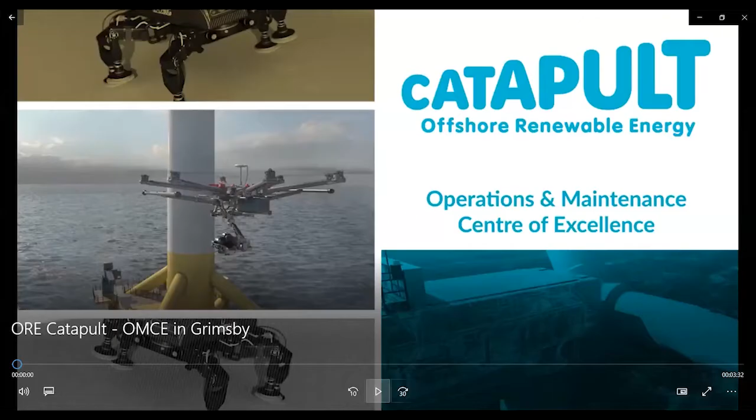Delighted to announce the opening of our new facility for the Operations and Maintenance Centre of Excellence. Situated within the port of Grimsby, we have located ourselves at the heart of UK operations and maintenance for offshore wind. With planned investment of over £35 million in the next 5 years, we are committed to aligning our services to the needs of this growing sector.

I'm very pleased to personally welcome the Operations and Maintenance Centre of Excellence to its new facility within the Port of Grimsby. Offshore Renewable Energy Catapult's move is a reflection of Grimsby's leading role in offshore wind, one of the UK's fastest growing energy sectors. We have a long and proud maritime heritage, so it is testament to our town's ambition that we have transferred our skills and expertise to a major and long-term industry in offshore wind.

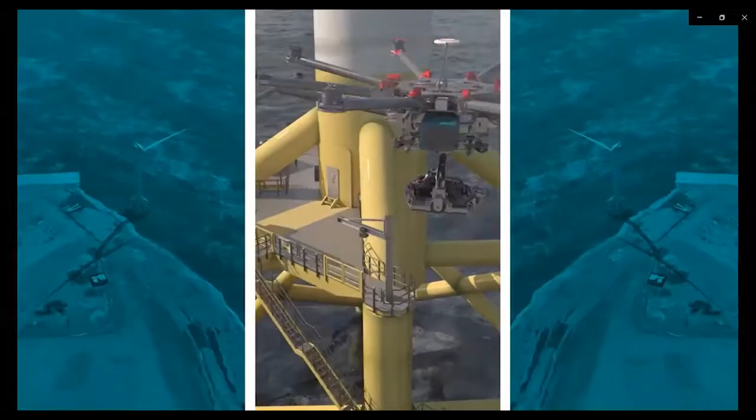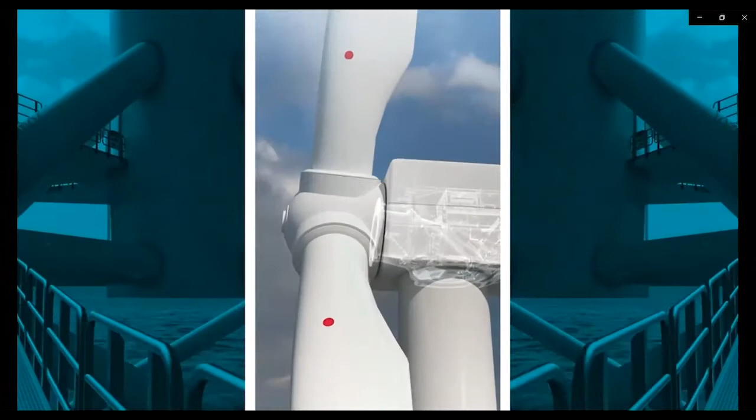Our move comes at an absolutely critical time, not just in support of the growth and prosperity of our own industry, but also for the UK's green economic recovery and progress towards our net zero goals. The Operations and Maintenance Centre of Excellence will play a central role in this, collaborating with key industry stakeholders, UK supply chain and academia to accelerate new and innovative technology and best practice for wind energy in the UK.

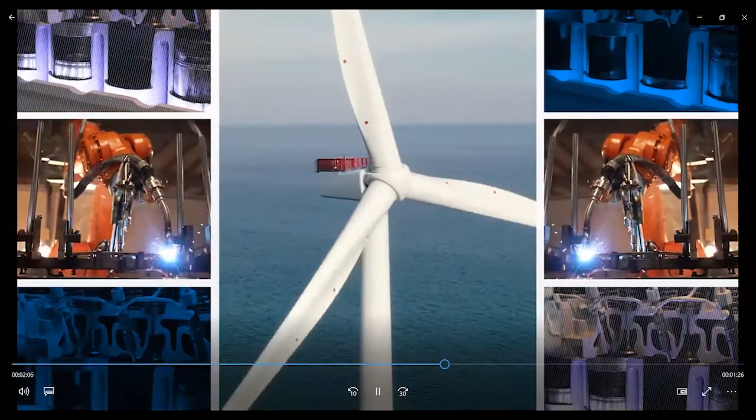This will focus on accelerating some of the most advanced solutions to the market in areas such as robotics, autonomous systems, artificial intelligence and predictive maintenance, which will serve to enhance the UK's status as a world leader in offshore wind. In turn, our activity will help to drive economic growth, particularly across the supply chain, utilising skills and expertise from other strong UK sectors such as automotive, aerospace, oil and gas, defence and data and digital. This will be vitally important in job creation and building long-term economic resilience.

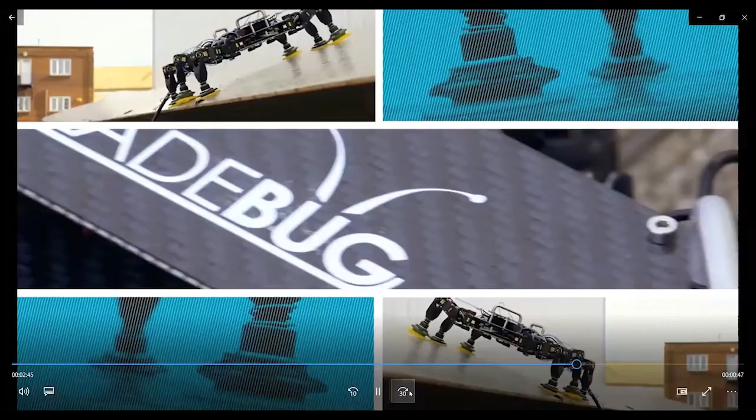Our port is already home to some of the industry's biggest players, and we are perfectly located to service the world's largest offshore wind farms in the North Sea. By working closely with ORE Catapult, we can continue to attract inward investment, create high-value jobs, nurture innovation, and develop our local supply chain. This is an incredibly exciting time for Grimsby and the Humber offshore wind cluster, and I look forward to working with ORE Catapult as we continue to make Grimsby and the UK a global leader in offshore wind operations and maintenance.

I'm very excited by this next evolution of our Operations and Maintenance Centre of Excellence, and I look forward to the team continuing their fantastic work to keep our industry at the forefront of the UK's clean energy strategy.

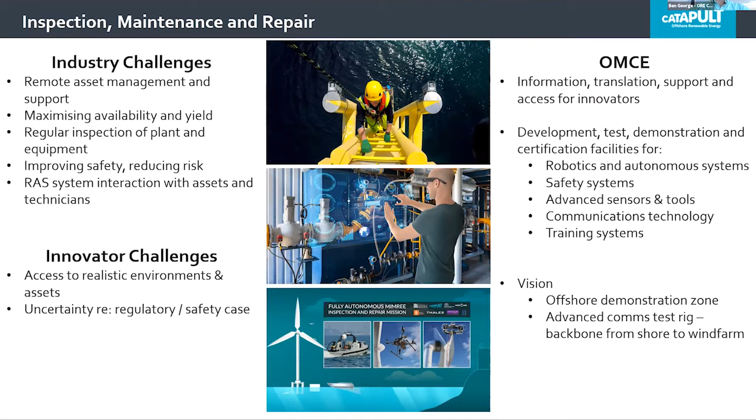Today we've got a little more detail of the agenda coming up. We're taking the 3 themes that Ben discussed in a bit more detail as our strands throughout the day. In the first session, we'll be looking at things like how we can fast track the energy transition and how we address the challenges of using remote and autonomous systems for dull, dirty, dangerous, demanding, distant and distributed work in that sort of context of offshore wind.

Then we'll come back at 1 o'clock. We have a discussion on meeting the challenges of maritime decarbonisation, what fuels, how to deploy them. And at 2:30, we'll be looking at how we make data-driven decisions from looking at the weather through to the end-of-life strategies we might be implementing for these wind farms.

Today is the start of what will be a rolling programme of showcases and exhibitions at the OMCE. We will be deep diving into specific topics, starting off with metocean and alternative fuels, and more to be released as we unveil them. We plan for these to be engaging, collaborative events to bring together industry, innovators, cross-sector working, academics, bringing the whole host of expertise together so that we can really go into detail and get people to understand what's coming, what could be coming, what projects they could be involved with.

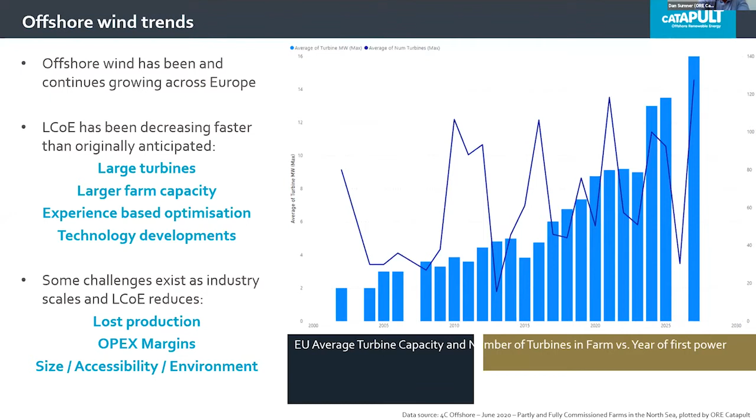Within the North Sea, we currently have commissioned about 16 gigawatts worth of wind capacity, made up of around 3,500 turbines. By 2035, we might see as much as 136 gigawatts worth of wind capacity - that's about 8 times the current amount in the North Sea, but only made up of 7,500 turbines. So you can see the trends that we were talking about a minute ago.

A trend we're seeing in the North Sea is the increasing distance of farms from shore as well. The plot on the right shows the average distance of farms from shore in the North Sea over a number of years, slowly increasing. The motivation behind this is down to a number of factors, including space for leasing, what the wind resource is like, what technology advancements are unlocking new sites, and decarbonisation of maybe other marine sectors.

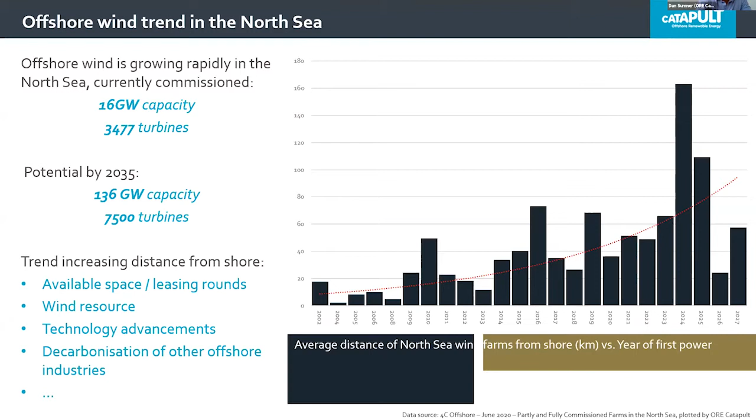So looking at similar things, but maybe on a map - everyone loves a good map. Let's look at the offshore wind industry currently in the North Sea. This map shows currently commissioned wind farms. Each circle is a wind farm, and the size of the circle is scaled based on the capacity of that farm. The colors represent the foundation types on which the turbines sit.

So quite easily, you can see that fixed foundations are by far the norm, with monopiles making up the majority. We can also see that all our assets are relatively close to shore, with much of the North Sea still available.

So real quick recap, what do we know so far for offshore wind in the North Sea? We're moving further away from shore. Met ocean conditions on average are going to be more severe, maybe higher wind speeds, greater wave heights. We know that water depths are increasing beyond the 50 to 60 meter range considered deep water. We know seabed sediments are becoming more variable, and we know there's an increased proximity to other users and assets.

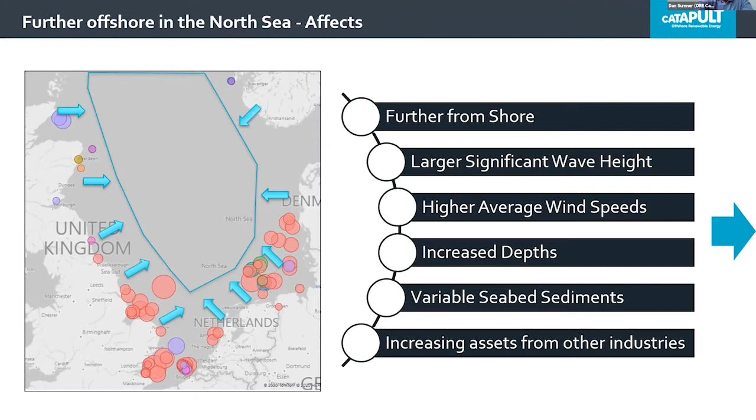So what's the impact of these changes, and how does that affect O&M? Here's just a handful of challenges that I've highlighted further from shore. So as we get further out from shore, how does your O&M strategy change? How will this impact logistics, the importance of connectivity, comms?

As the water depths increase, how does that impact your cable lay route, or what impact does this have on installation vessels? As wind speeds get increased and as larger waves start to hit, are your robotics ruggedized to this harsh environment? And as you start to work with other infrastructure, how does that physically work in simultaneous operations, as well as things working with partners in aviation?

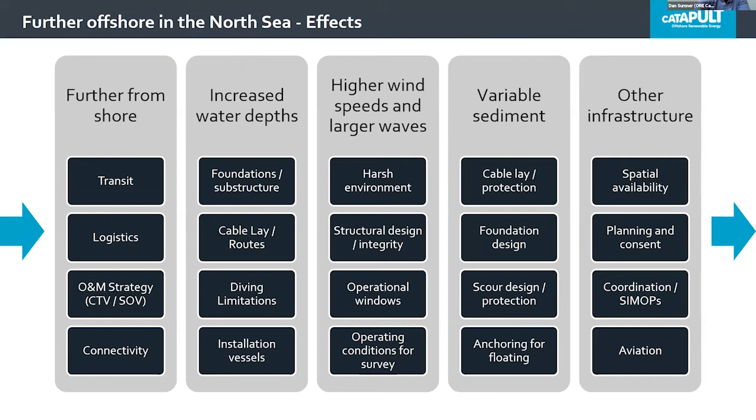So the question for the panelists today is: are robotics the answer? Robotics and autonomous systems are forecasted to reduce cost and improve safety, but from experience with the Catapult there are some common barriers to entry. Is the technology ruggedized? Is the performance good enough? Is survivability there? What about the economic case in terms of cost or time? What about regulatory and process - does it meet current legislation or standards, even for the future? And the wider, more open societal changes - do we trust these robotics? Is the confidence there through a number of different stakeholders?

Hopefully, to touch on some of these interesting questions, we've got a great panel for you today and some great presentations. We have Professor David Lane, Hub Director at ORCA. We've got Rebecca Allison, who's an Asset Integrity Centre Manager at the Oil and Gas Technology Centre. And we've got David McKinnon, a Technology Advisor through the TLB. So with no further ado, I would like to present David Lane.

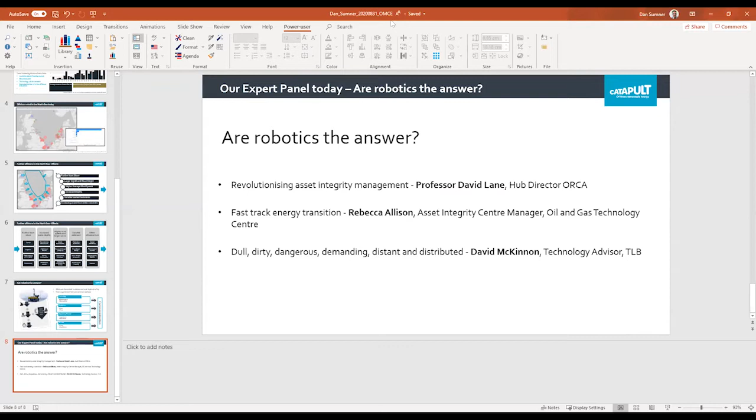So let's start this slideshow, play from start, here we go. Okay, so I'm going to go for sort of 15 minutes or so. Thank you for the introduction, Dan. My name's David Lane. I'm the director of the Edinburgh Centre for Robotics and also a thing called ORCA Hub, which I'm going to talk about today.

The Centre for Robotics in Edinburgh is a joint venture between Edinburgh University and Heriot-Watt. We're about 30 academics, 120 million of activity, 120 PhD students and postdocs. So we're a big engine of research and innovation in robotics and AI, not just in offshore energy, but also in other sectors like construction, nuclear, agriculture, medicine and so on. So we're quite a big machine.

I wanted to just say a little bit about who we are and how we fit into - it was great to hear Ben and Catherine's comments and the new facilities at Grimsby and how that fits with ORE. How do we fit with all that in the work that we do? And Dan mentioned the idea of innovation - how do we get ideas and research from university world into, in this case, offshore wind and O&M.

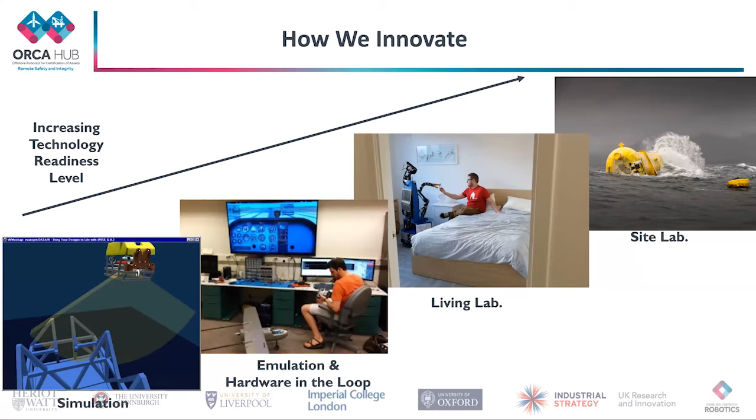Whereas we have the ability to simulate, emulate and do living labs in our facilities in Edinburgh, we need to work with partners such as the new facility at Grimsby, ORE, and others in Rosyth and other places in order to give us access to site labs where we can actually try stuff out and go and do it.

And a key enabler in this, it was great to hear Ben mention this in his introductory comments, is the use of digital twins. For me, this is one of the huge growth areas that this industry and other industries need to get their head around, in order that we can do the how, not just the what, of some of the visions that Ben was talking about in his presentation, and indeed Dan was saying in his.

I'm not going to talk about this too much today, but the future of digital twins is all about not just individual twins, but connecting them. There's a whole lot of work that we're involved with, which is about establishing the data infrastructure that's going to provide us with the core means to do the kind of translation talked about in the previous slides. There's a twinternet, or worldwide twin, out there waiting for us, much like the World Wide Web, which will be equally transformational in the way that we move things forward.

I don't have time to talk about the detail of it here. I am doing something this afternoon at a Subsea UK event where I'll say a little bit more about that, but that competes with this, so I won't say any more here.

What Dan asked me to talk about, and I will in my time, is more about this thing called ORCA Hub, which is a hub that involves all the universities you can see across the bottom there - ourselves at Heriot-Watt in Edinburgh, but also Liverpool, Imperial College, and University of Oxford.

It's funded by the Industrial Strategy Challenge Fund. It's part of the 96 million that was made available for Robotics for a Safer World through Innovate UK and EPSRC 3 years ago. Its whole point is to do use-inspired research, but also to translate that into products and services and to start that process.

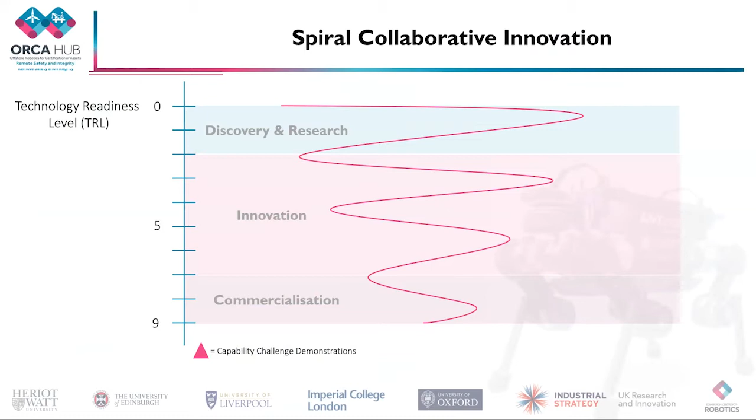And we have our core research themes. We have support from the Engineering and Physical Sciences Research Council that supports the researchers, but our partners' funding support helps us go from the journey from the early stage research and TRL 3-4, which is what we do in the lab and in the universities, through to 6, 7, 8, which is what takes us out into the commercial world.

And so we use the funding support of our partners in order to take the results of the research, and we have a big emphasis, and turn it into products and services. So we have a big emphasis on thinking not just about the science that we do, but also the use cases for that science and the capabilities that are required in order to realize those use cases.

So success for us is journal papers, it's good applied science, use-inspired science, but it's also how good are we at turning these into commercial products and services.

So what I'm going to do today is just talk a little bit in the time I have about some of the core science work that we're addressing, and then talk as much as I can about some of the applications that we're trying to take them to. I'm a bit limited in what I can say there because there are some sort of commercial competitive pressures which get in the way, unfortunately.

And then a call to action at the end saying we'd love to work with more people from the offshore renewable energy supply chains in order to help us get this right and make the innovation pipeline from the fantastic science base we have in the UK through to products and services that support our industry.

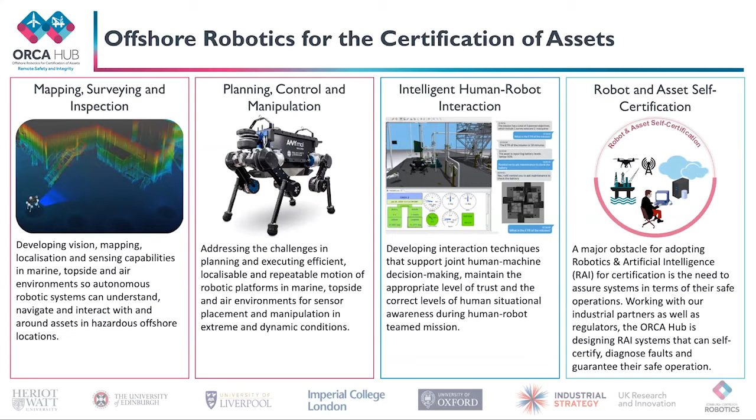And then finally, some work on certification. Certification of the robot primarily for us, but also certification of the asset, because that's ultimately what you want. Self-certification, I think, is an interesting topic not yet properly explored. Can we build assets that self-certify their safety? That's an interesting idea. Certainly we could try to do that with robots.

I haven't got enough time to give all this work justice, but I can give you some flavors of the things we get involved with. For sensing and perception, we care about reconstructing 3D shape from 2D images, from motion, inferring our own motion from how we perceive objects moving in the environment—so-called SLAM—and then building semantic understanding from that. If a robot's going to plan what it's going to do, it has to understand what it's seeing through its sensors, and turn that into actions to achieve its mission.

Various examples of the data structures we deal with: sonar, video, and other NDT sensors like EMAT, which I'll talk about again in a minute. We do 3D reconstruction, and we build semantic maps from that—these are the semantic descriptions, what people call ontologies.

These are all components of digital twins. When people ask what a digital twin is, it's not just the physical representation of the world and its physics—it's also about the semantics of the world, and the processes people are involved in to carry out their tasks and work. So digital twins is a more complicated idea than just physics and geometry.

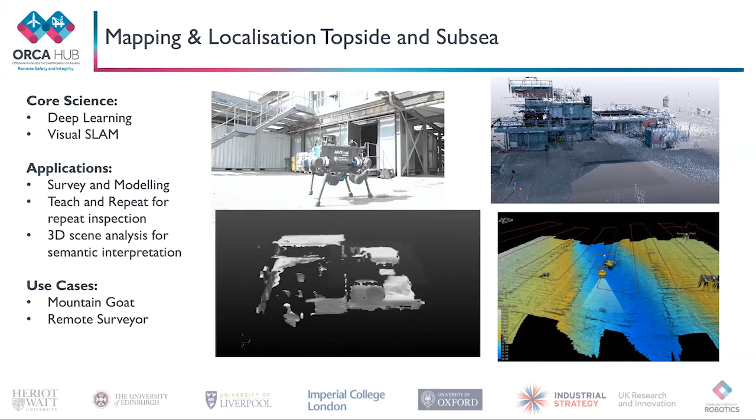You'll recognize some of it from self-driving cars—that community is similarly engaged. The difference is we're doing it with drones, on the asset, and also underwater. The underwater community has been doing this for more than 30 years, so we've been doing it a lot longer than the self-driving car community.

We're also interested in sensor networks and the robotics Internet of Things. We care about, particularly for subsea assets—more important in oil and gas than in renewables—being able to network nodes, communicate, and relay information from one node or vehicle to another when communication distances are limited. You can't use TCP/IP and standard internet protocols as we do in air, for reasons about packets and retransmission, so how do we build ad hoc networks to do distributed sensing and use that for navigation?

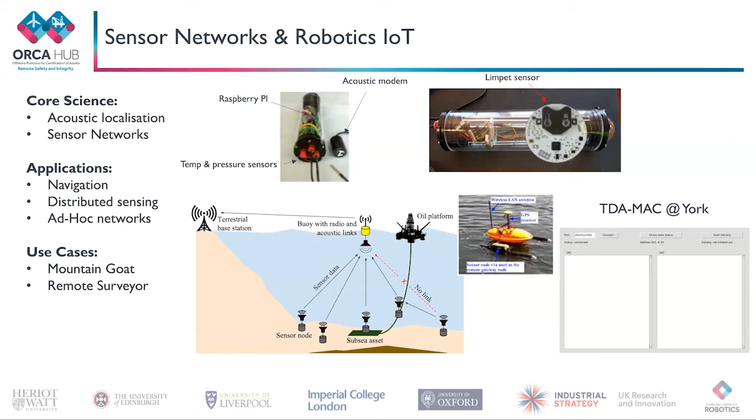So using acoustics—acoustic modems underwater—there's a big piece of work going on there with various of our partners.

We care about sensor development, and not just the sensor development, but also the sensor delivery. Drones are increasingly used for inspection, but the boundary of where a drone is going next is also about how drones intervene and do physical tasks on assets offshore. So we're thinking about that.

This is an EMAT sensor—I won't go into the detail—it generates ultrasonic waves for doing inspection and crack detection in welds. We've got some small portable sensors that we're able to deploy from drones, for example.

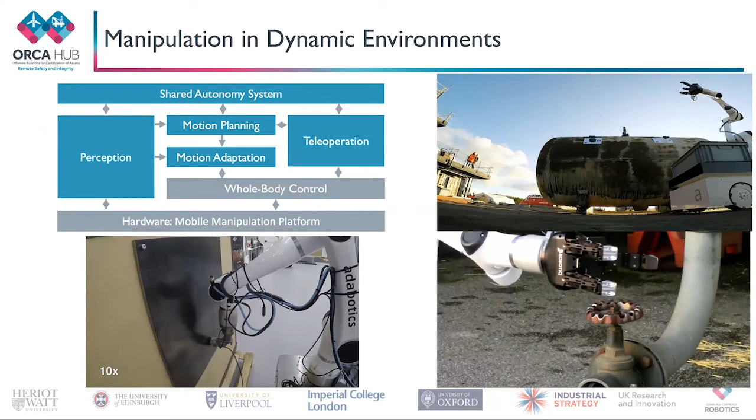The videos you're seeing on the right-hand side show some examples of how we're planning the motions of mobile robots so they can deploy sensors while they're on the move. What's novel here is that most warehousing robots stop and then do a manipulation or deployment. Here the robot doesn't stop, it keeps going. The way we plan the motion in the top diagram is actually more difficult, but it has advantages in how quickly you can deploy sensors this way.

The sensor we're deploying is called a limpet sensor, an example of a class of sensors you may want to deploy to give long-term in situ measurements of other things from the asset for its integrity.

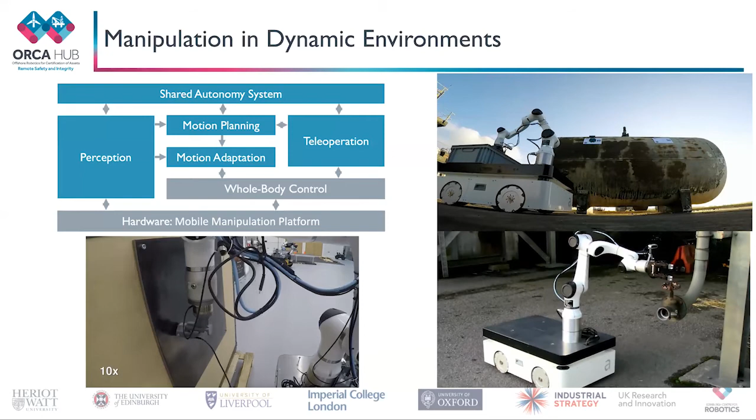The one at the bottom is just showing off. It's called chicken head, and it shows that we can stabilize the tip of the manipulator while moving the body, which has a high number of degrees of freedom.

We're also involved in the platforms themselves. You saw wheeled platforms in the previous example; here we're looking at using quadrupeds. Some of the environments we get into on offshore structures, and elsewhere, aren't really amenable to wheeled robots, so quadrupeds are the future, we think. There are large numbers of degrees of freedom, lots of opportunity, but lots of issues as well.

We care about what happens when going over uneven terrain or trying to go up ladders, and robots falling over. So we use machine learning here — this is an example of where we cross the digital to physical divide. We do a lot of the machine learning about how the robot can learn to stand up when it falls over in the digital world, and having made that work, we move to the physical world.

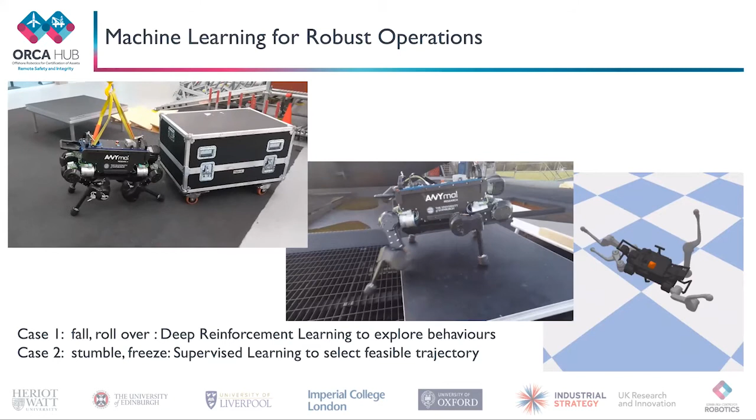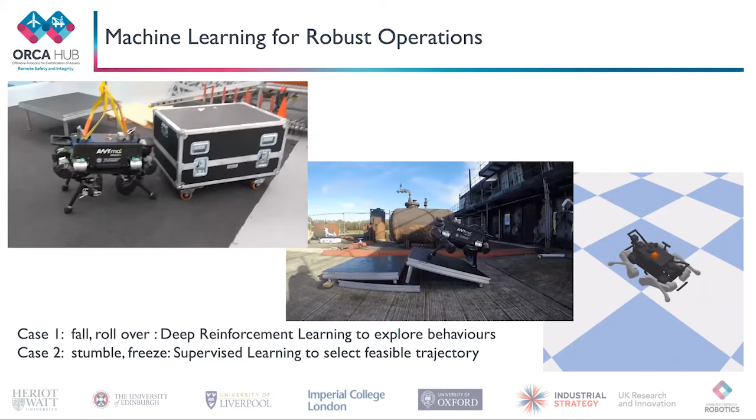That's the journey I talked about earlier — hardware in the loop, then living labs — we work with the real robot to do that. The test here, the living lab environment, was at the Fire College, a realistic environment we could set up. Some of the things top left show how we can use the robot to physically intervene in the environment, something beyond what a mobile robot can do without manipulators. We're researching this, understanding the science and how to use it.

On the human-robot interaction side, how do we know what the robot's intending to do if it has any kind of autonomy, either fully autonomous or shared autonomy? We're working on generations of interaction systems that are explainable AI, where the robot can explain what it's doing — think of it as WhatsApp with your robot.

Here's an example of a system called Miriam, a kind of personal assistant. You'll see a virtual, graphical world modeling drones going off to inspect a fire on an offshore structure. In the chat window in the middle, you can see some of the dialogue between the operator and the system, asking what's going on, where are the robots, what happens next, how long have we got before we hit a critical point.

So it's not just about the robot, it's also about the state of the asset and the state of the situation. We think this is an important technology — as we have more sophistication in the robots we take offshore, this kind of ability to explain and interact is important.

Beyond Alexa and Google Home or any of these chat interfaces you have at home, it's not just a one-shot exchange — not just I ask a question, you get a reply, and the next question is something completely different. There's an element of narrative in this, so that each exchange between the person and the system builds on the other, and you develop further from that.

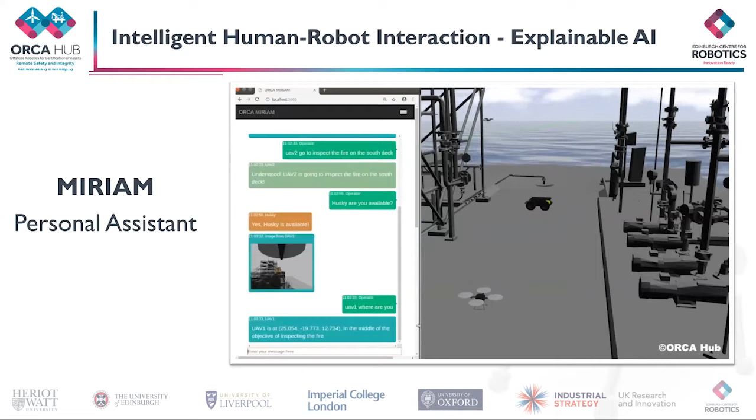That's more complicated than you'd think. As soon as you get into that kind of narrative and discourse, it's quite complicated how we decide what to say next based on what we've already said. It involves a shared understanding of the state of the world and the domain we're having dialogue about. So we're trying to develop that and take it offshore, also using novel kinds of interface.

So the chat doesn't just have to be through a WhatsApp kind of interface. We can use talking heads such as this one, called Furhat, that hasn't got his hat on today. I've turned the sound down because it's a bit annoying on a talk like this, but you get a reply back from the system telling you what's going on.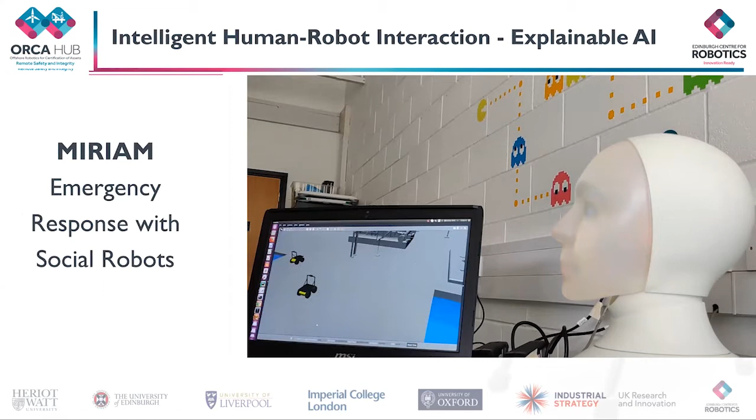So we think this is the sort of research that's part of the systems that we see for the future. And I apologize for the noise in the background, I've got a dog and visitors in the house, such is life during the pandemic.

Finally, I want to talk a little bit about robot and asset self-certification and the kind of work we're doing there.

We are interested in robots being able to certify that they are safe, but also how do we go about certifying that the asset is safe. And this takes us into the domain of things like condition monitoring and prognostics.

Digital twins are really important to this. The digital twin should be running in parallel with the real asset. If you're running machine learning on the digital twin and the asset, that gives you the essence - you can understand when something diverges between what the twin is saying and what the asset is providing you with real-time data. That's part of your prognostic and condition monitoring strategy. So digital twins are very important for that, and we're trying to develop some of the machine learning technology around that.

Here's a simple example on one of the robots, and it's not just about recognizing that you've got a problem. It's also about what you do about it to keep everything safe in the short term.

So here's three pictures, videos left to right. It's an underwater robot. The one on the left is successfully traveling from one point to another. The one in the middle, we've deliberately failed one of the thrusters, so it can't hold the heading anymore, and when you try and drive in a straight line, it just spins off at a funny angle like that.

Which isn't safe behavior. The corrective action we can take here is that even with a damaged thruster, we can still adapt the thrust vector that the robot carries out. So in the right-hand one, called automatic recovery, you can see the robot moves from the start point and ends up at the desired target. It's just not pointing in the right direction, which is a much safer behavior than the one in the middle where it's sort of spinning off out of control.

So this is the kind of thing that we're thinking about with digital twins and control systems at the heart of that. We think hard with our industrial partners about how to take these capabilities that we generate from the science base and turn them into use cases that can be useful to companies.

At the beginning I showed the spiral innovation model that we use. So here's some examples of the use cases we've worked on - we've got a cartoonist to try and map them, they're a bit too complicated for the time I have here. Subsea inspection and survey, autonomous inspection, maintenance and repair, unmanned autonomous decommissioning - these are some of the things we think about.

And some of the demonstrations we've done over the years - this is one, the first we did in July 2018. We went up to the Underwater Centre in Fort William, which went out of business but is now back again, just. This has been a great test space for us over the piece, particularly for doing marine work. You can see some of the capabilities we've demonstrated there with our industrial partners.

We did a second set of demonstrations at the Fire College, which is in Middle England - I can't remember the name of the place - where the fire brigade normally go to practice putting out fires. That was great for us for practicing some of the terrestrial robot applications and drone applications in particular.

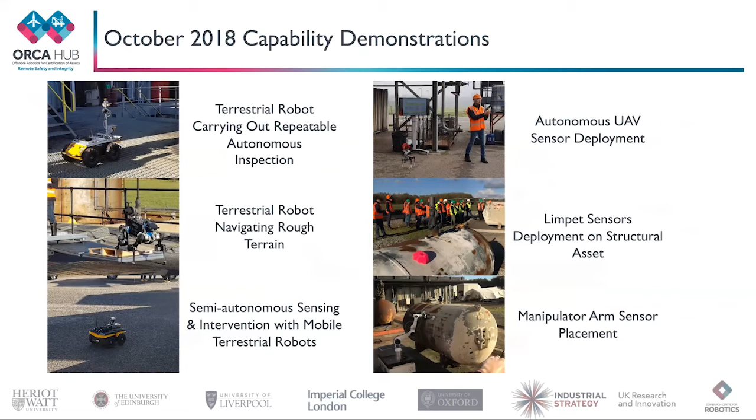And then latterly, the last set we did before the pandemic and the lockdown, we went to Blyth, and Dan was there and involved in all that. And we did a series of demonstrations there.

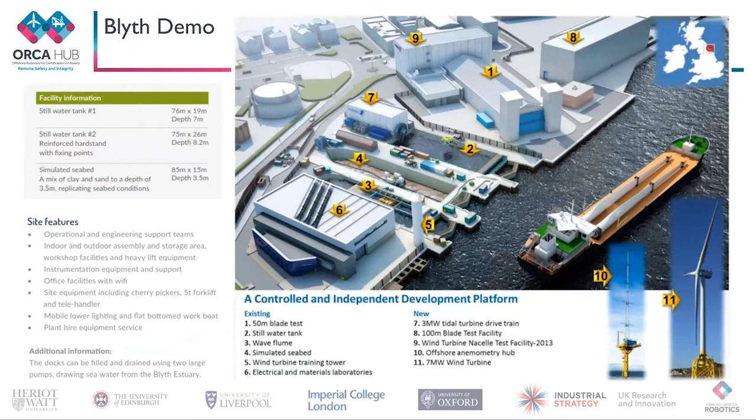I've got a little bit of video here which, if I can get it to go, can show some of the kinds of things we were doing. Again, I haven't got time to go through it. Here we're showing some examples of robots going off to do inspection, and here's everybody getting a brief.

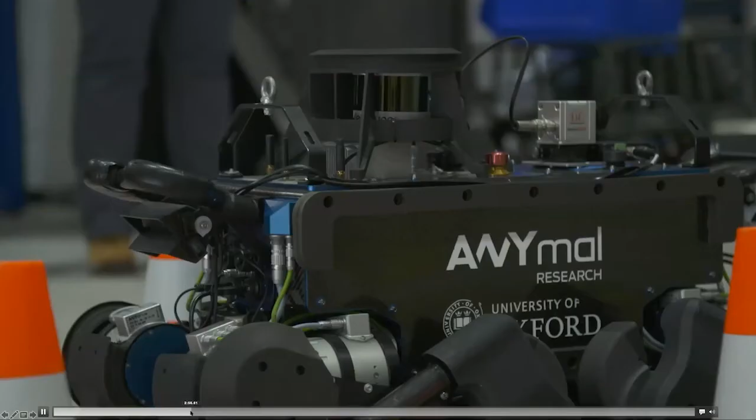Here's ANYmal. The ANYmal robot's going off, working completely autonomously in this case. It's mapped its environment, and we're going on to the ROV piece next.

What was good about this is that we deliberately failed some of the computers on the robot, and we were able to reconfigure the robot on the fly as part of the self-certification. So the robot recertified itself and reconfigured its computing on the fly in order to deal with those kinds of failures.

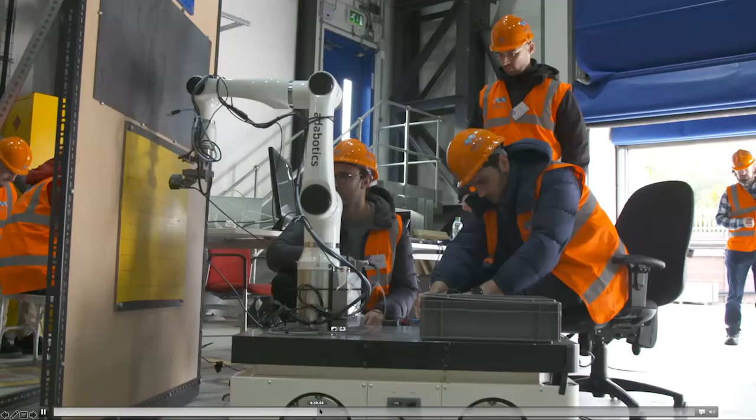We did a lot of marine work there. The visibility was terrible. I just wanted to show one thing, and I'll be careful what I show here — the drone. Here's an example of the sort of drone technology done by the team, Mirko Kovac's team from Imperial College London.

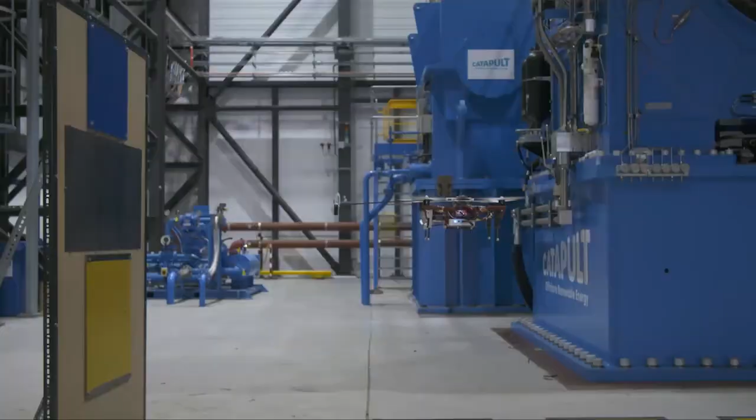And this drone is carrying, imagine it's carrying a sensor. It's about to fly into this panel on the left-hand side. And imagine the panel on the left is the blade of a wind turbine. What we're going to do is inspect or indeed do some maintenance on the blade of that wind turbine.

So what the drone is going to do — I'll speed it up a little bit here — is connect itself, and then the cool bit is it's using tensile perching, so-called, bio-inspired from how spiders and other animals work in nature. The drone lowers itself back down onto, in this case, imagine it was a blade. And once it's got there, it could move around on the blade, and indeed it could do some inspection.

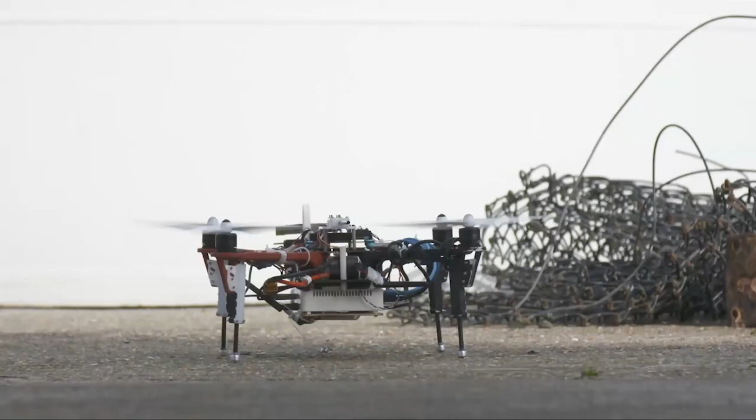This is a very, very early stage, crazy idea demonstration of the control systems and the principles. Clearly, you have to robustify that a lot to get it to something you can take offshore. But there's some very novel thinking here about how we take the capabilities of drones in this case and move them to a place where they can do physical work around structures, which is desirable for doing the maintenance part and the repair part, having done the inspection part, which we do well at the moment.

Right, what's happened here? I think I'm looking at the wrong screen now. I'm not sure what you guys are looking at. Probably getting — I'm not sure if you're seeing the whole of my screen here. How do I get this to go back? Are you still seeing the screen, or what are you seeing? I'm not sure, I'm seeing something different here. Okay, let's move on to the next slide.

After 24 months, we've had 11 industry translations, an estimated added value of 2 million, and quite a large pipeline of research going forward, some of which are spin-outs like adabotics.com coming from the hub.

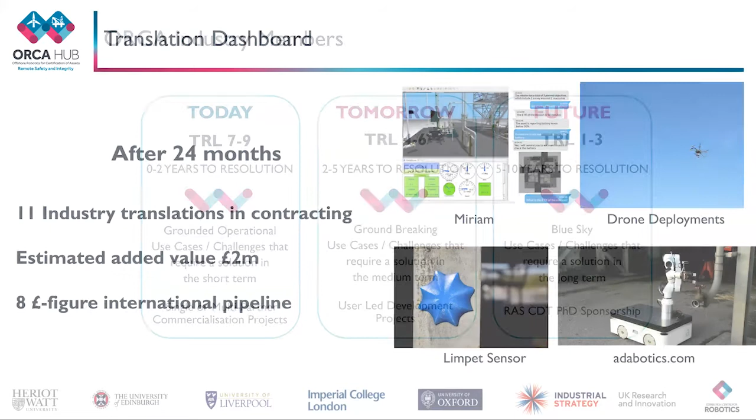I think there's something going on with the slideshow here, so let's try and do — let's go up here to do it, play from the current slide, there we go. Right, so let's go back the way, that's better. All right, sorry for the gremlins there, everybody, this is PowerPoint funny.

I'm not able to talk too much about the detail of those because there's some level of commercial in confidence, but suffice to say there are companies mainly from the supply chain and from oil and gas who are taking this up and turning it into capabilities and helping us take it out to higher TRLs, around 6, 7, something like that, and then ultimately taking it offshore.

So the call to action here is that we're able to work today, tomorrow, in the future in the way we work in the National Robotarium. TRL 7 to 9, we're interested in single and multi-party commercialization projects from this. For tomorrow, TRL 4 to 6, we're interested in user-led development projects. And for the future, we're interested in people getting involved in sponsoring PhD students in our Centre for Doctoral Training, and plenty of EPSRC-funded PhD students interested to work on projects like this.

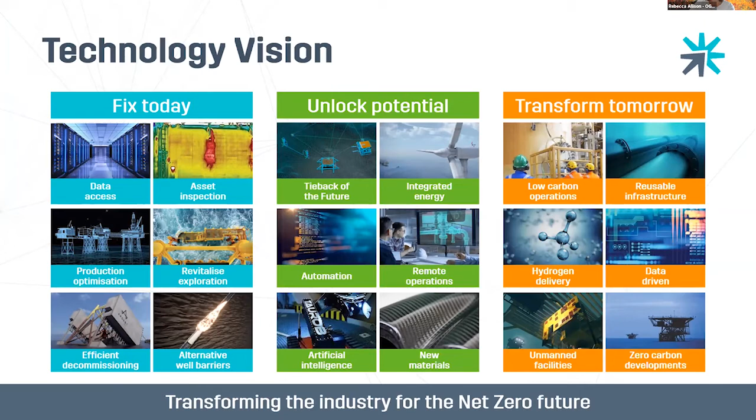So where does that all fit in today? Because we've talked about robotics, automated systems and digital twins. And one of the things I keep thinking and going back to, we've got a bit of a disconnect within our industry, and I'm not quite sure how much disconnect there is in maybe the renewables as well. But certainly, I recently started looking at inspection integrity reporting, because it has been a big topic. Not so much the robotics and automation side, but ultimately, what do we want the robots to do? Well, we need them to actually ascertain what the asset condition is.

So when I started looking at this from a reporting point of view, very familiar scenes: we send people off to do some inspection, whether it's on a fixed jacket or hanging off ropes or using iPads to put the data into—all very familiar scenes.

And that's still going on today. If you go to any offshore asset, we still have people doing this type of work on a daily basis. But we talk about being automated and digital, picking up our phones for online banking, booking cars in for MOTs. Especially since the pandemic, we get sent a lot more digital information. I haven't signed a bit of paper for a long time now. But our offshore industry is not quite the same.

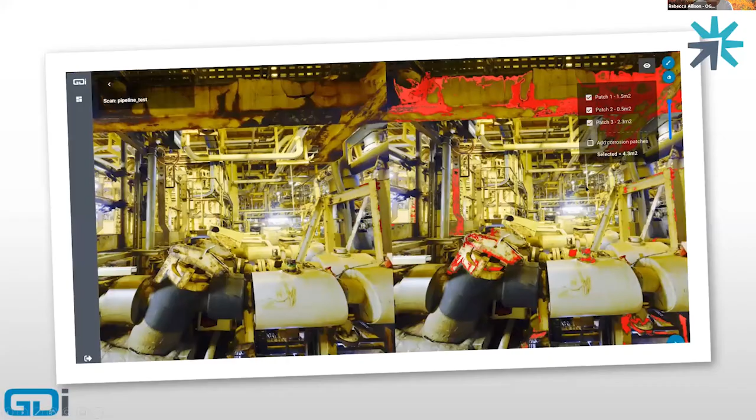But it's not all doom. We do have some companies, and we've been working with two companies in this space. A company called GDi have been looking at digital twinning, which is why I'm now interested in Twinternet, but using digital twinning in a slightly different way, because there's always a different interpretation of what we mean by digital twinning. GDi are a small company based in Aberdeen. They are a software company, not an inspection company, though they do have inspection capability. They've brought in expertise of subject matter experts, but what they're doing is using laser scanning technology to be able to start assessing condition from the scan data.

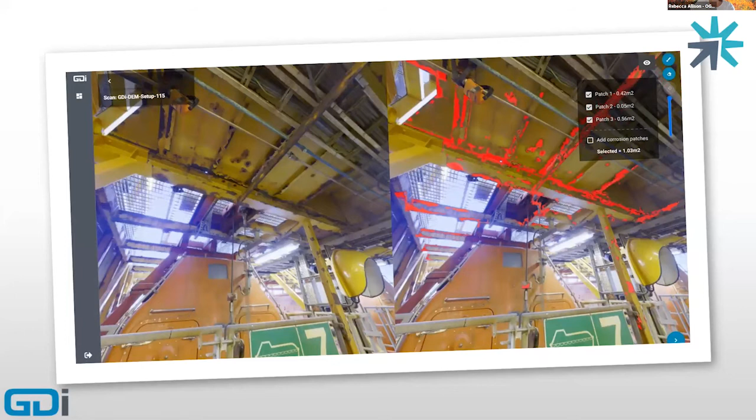So what they're doing is effectively going out doing multiple scans. At the moment they're prototyping, so it's just going out with a person, but ultimately it could be adopted onto any robotic solution, using the data to ascertain the asset condition, which means we don't need the reports we've just showcased. They're in trials with a couple of the offshore industry partners we're working with, and ultimately they're able to determine fabric maintenance condition, but also remaining wall thickness and actual condition. They're about to embark on another phase of the project to take it further, to do it a lot more automated, because there's still a bit of manual intervention involved in stitching some of the scan data together.

We're also working with another software company called Imrand, and they're looking at it from a slightly different aspect. Rather than digital twinning, they're using the inspection data that's being gathered - the huge amounts of information - and trying to spot trends. They've been using it for more legacy data. A lot of our assets have lots and lots of sensor data readings, whether it's wall thickness readings or online sensor monitoring activities. They're using automated and artificial intelligence methods to spot trends that we would normally not be able to spot as a human being. Their system, called ADA, is actually now in the market, completed, and they're doing very well successfully from that point of view.

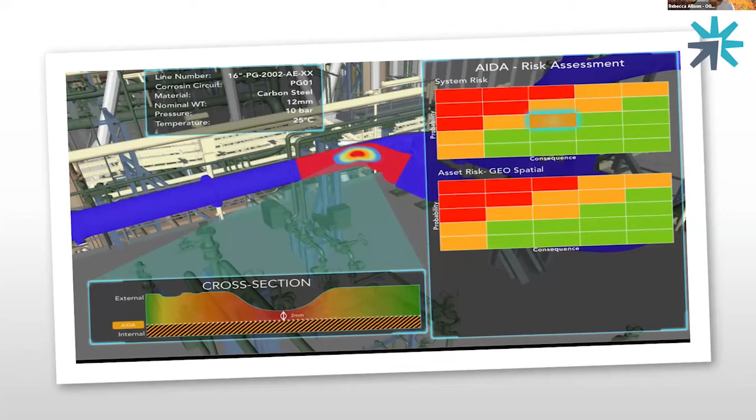What they're doing next is really starting to look at where the trends are, and being able to hotspot that onto the digital twin. These digital twins are live and interactive, and what they're doing is taking past historical data and overlaying it with live data, using process data, chemical data, and internal erosion monitoring data. This is very oil and gas specific to a pressure system, but this type of technology can be translated into different scenarios, giving you a quick snapshot in a live environment of your threats and areas of concern.

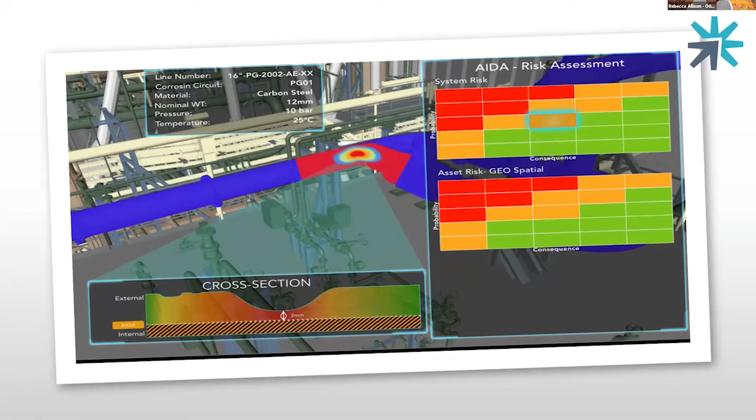They'll be able to start trending and showing areas of bigger concern, so you know where to do some intervention. So using the data analytics type technology and the inspection reporting capabilities, and moving that into the robotics piece, you can see it all coming together.

But to me, there does need to be a lot more work done, and David has alluded to some of the work that ORE have been doing from the sensoring and robotic systems side. But I think there's also a bit we need to do as end users to start thinking about what it is we want these systems to do, and whether we're willing to accept that these robotic and automated systems will actually give us the information we want and that we'll use it effectively.

Because there's a piece around the human factor side of this - are we comfortable gathering data like this? Are our service providers happy and comfortable with the information being presented, and can they give the reassurance and acceptance that when the report's produced, they're comfortable to say we can sign off on this, that this asset is safe?

That's some of the challenges we're seeing from the other side of this service chain, where we're not 100% sure if these systems are a direct replacement for a human being, or whether we're comfortable that the competency is there, that what we're getting is the right information. So there are some challenges around the whole human factor side of acceptance of an automated system taking over some of the systems we've done manually up to date.

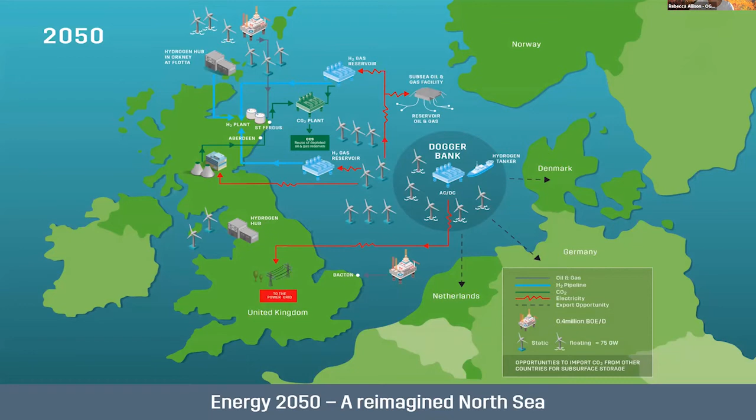So I'll share my last slide with you, one of my quotes that I like to use, from Back to the Future, Doc Brown. We have to stop seeing integrity or inspection management as an oil and gas problem or a renewables problem. We need to start looking at it as an engineering problem that can be solved. Because if we put our minds to it as engineers, we can do anything - we can put people on the moon.

Coming up with the smart vision of the future of how we manage assets in the North Sea, it's probably not that difficult. We just have to go for it and think about it a bit more. Robotics plays a key part, but we have to embrace it rather than say, yeah, it's on the periphery, we'll get to it. We are keen to do it, but a bit nervous. I think we just have to embrace it and go for it, because anything is possible.

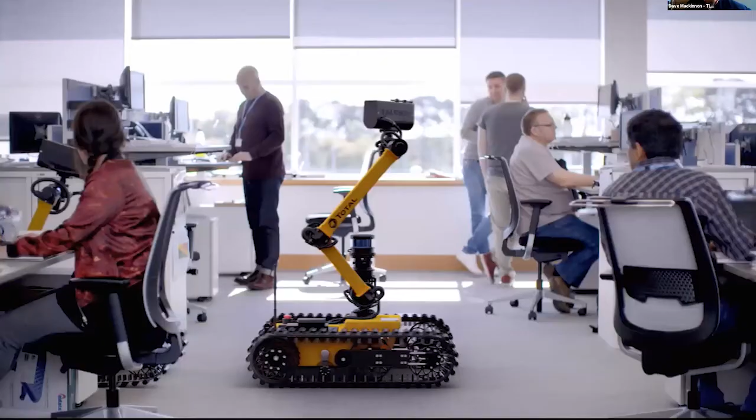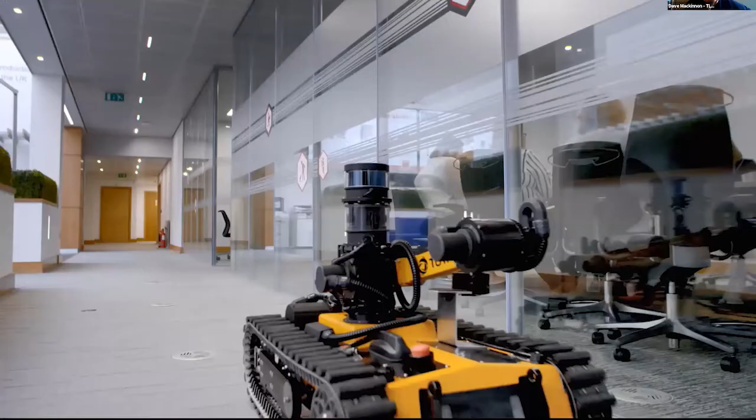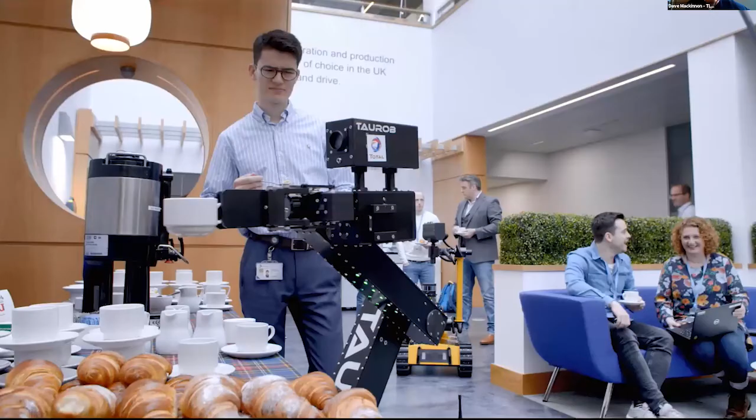At TEP UK, we want to embrace this opportunity of the future of digital, the future of autonomous devices, and robots fall into this objective and this ambition. Robotics was not initially a key topic for the research centre, but it has grown quite significantly, and now robotics is becoming a key part of the centre and a key part also of the global R&D of Total. I was pretty skeptical at the start, as most people were, of why are we looking at robots. Over this last couple of years, I really started to understand the skills and the competencies that you need to make this thing work.

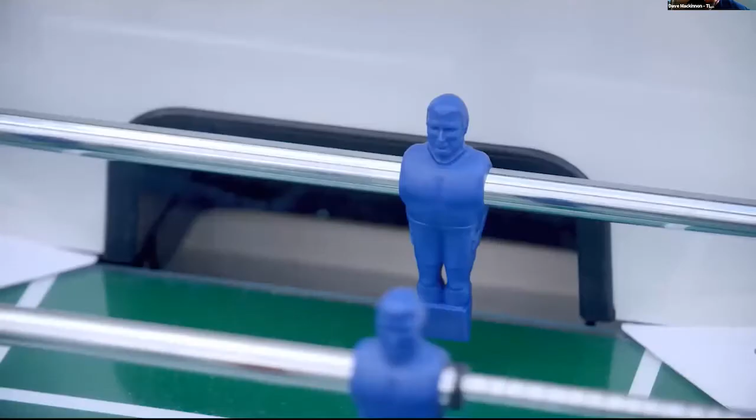I hope that the introduction of the robot is a bit like us getting our iPhone - it's then the apps that we develop and how we use that, so it's the start of something bigger. Autonomous devices like the robots will lead Total E&P UK and will lead our industry to a more efficient way of working on our sites. We see the benefits of the robot as also being very much about improving the safety on our sites. TEP UK has a history, I would say, of innovation, and they're known to pioneer new technology.

So we have the vision within exploration and production to remove all personnel from offshore, have them doing different roles onshore, so there's more remote monitoring and control. The vision of robotics with OGTC is very much around how do we fit into the future of oil and gas. We're looking at transitioning into a new era and looking at how we can make our fields more efficient, increasing our safety performance, and also taking people out of hazardous and extreme environments.

Robotics will play a key part of that, and that's why we're really interested in any technology that will help deliver that. Total decided to launch a robotics challenge. Total at that point didn't have much knowledge of terrestrial robotics.

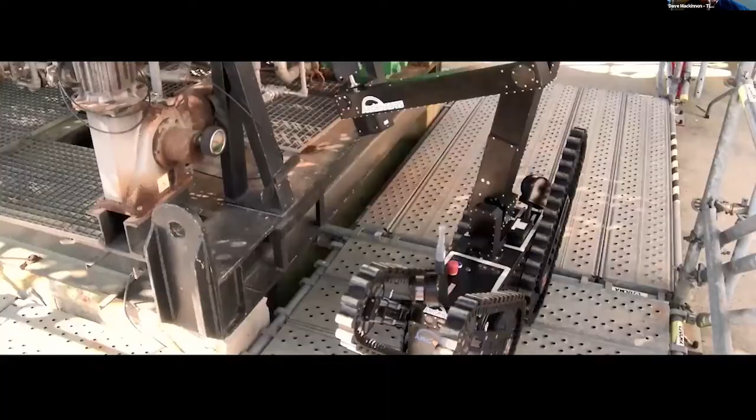We were able to prove some autonomous functionality, which was quite new at that time. We started working with Total in 2014 when the ARGOS Challenge was starting, and finally winning the challenge paved the way for another project that we are currently in.

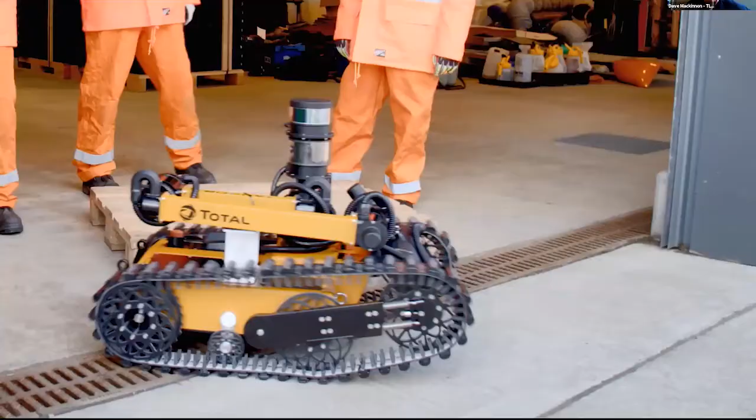This year is very exciting for us. We are doing a lot of on-site trials and tests, and then we will hand over two robots to Total, which will be tested on a continuous basis for 12 months.

Well, my job really here is to facilitate. I want these guys to be given the platform to advance their technology so we can utilise it for real out there in the industrial world.

These robots could be utilised heavily because they have got eyes, they've got ears, they've got noses, and they've also got thermal photography, which adds another vision that even we don't have.

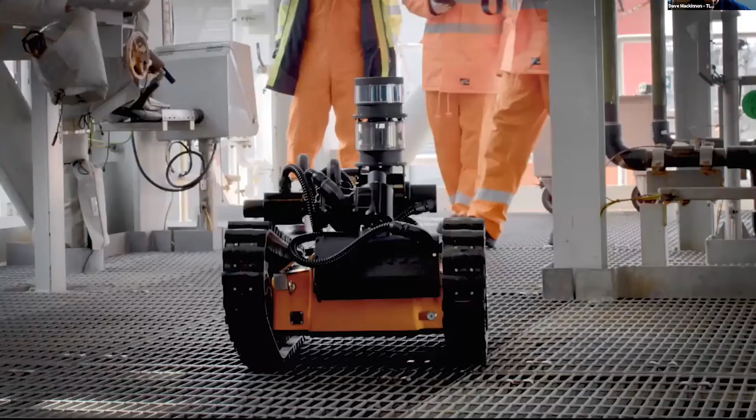We'll be able to collect some data, which will be transferred to the cloud of Total, and we are developing at the moment some dedicated machine learning algorithms to use this data as best as possible.

I think one of the big benefits the robot provides is the ability to take measurements and readings that we as humans just wouldn't be able to do otherwise.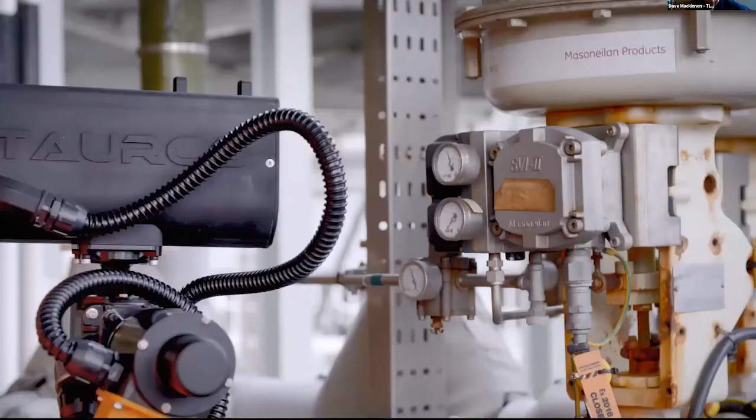For example, we can make use of the microphones inside the robot's sensor head to listen to the sounds being made by processing equipment, fans, motors, compressors, and we can use that information to determine if there are any defects or a gradual degradation in performance.

Ultimately, that allows us to then intervene on equipment preemptively rather than having to wait until the point of failure.

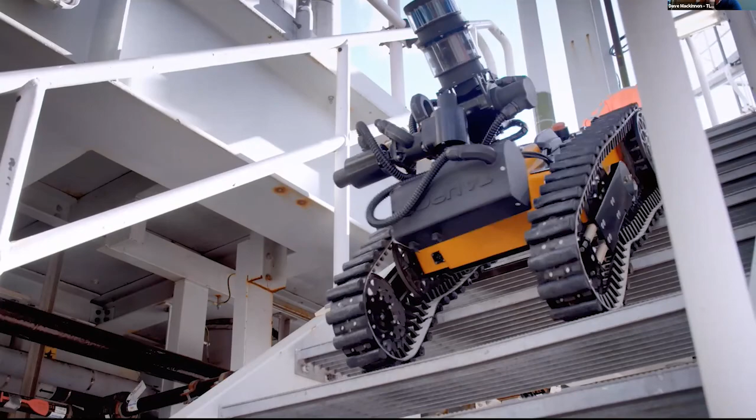If you look at what we do subsea, we send remotely operated vehicles, ROVs, down, and the ROVs do all our inspections, they do all our repairs, and what I see is the robot is essentially the ROV that's on the site. Actually, this is just the next evolution of that technology. It's just now hitting the actual beach itself as opposed to being underwater.

As we at Total start to understand the language and understand the technology, we're starting to understand the way that we can drive our business forward.

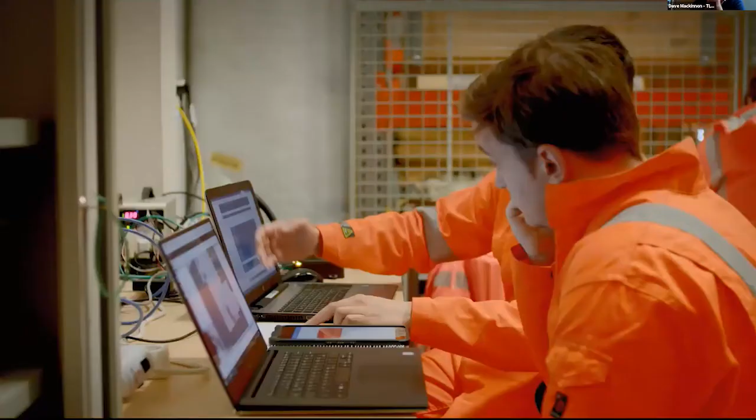And at the same time, with the very fledgling landscape in the region, start to support that landscape and starting to see a lot of other companies coming into that space. The robot will be an additional tool that will be used in particular on the unmanned platform, because we'll be accessing the platform at any time during the day or during the night without the need of sending operators.

Robots are very efficient when they evolve in an environment that has been designed for them. On this site, the human presence will be, of course, more limited.

There will be some sort of, I would say, job transfer with the creation of jobs that are not existing now, but I think there will be more support and they will increase the safety of the site.

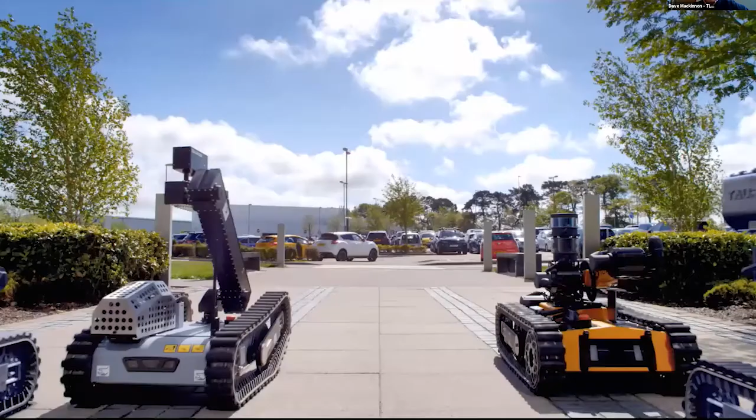Coming in the near future are robots, and they will be ready to join our operating teams on our sites offshore.

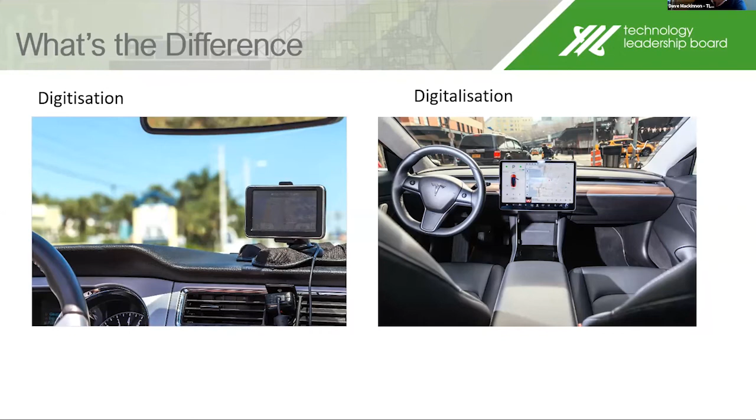That's important because it's, for us, one of the building blocks of the transition. We have to have a strong digital competency, so that will enable the maximum benefit of RAS systems, which then in the future enables the maximum benefit of offshore energy.

And that comes through better contextualized data, lower emissions, but also starting to be able to prepare for dynamic management in terms of logistics and energy.

Do we do the same from our operations? Technically, they've already figured out where they're going to come in the race before they even start, by running real simulations with real data to inform the driver how to outperform in the race. So effectively, the race is finished before it starts, and it comes from collecting a lot of data along the way. But one of the most important parts, apart from data and the technology optimization, is the rules.

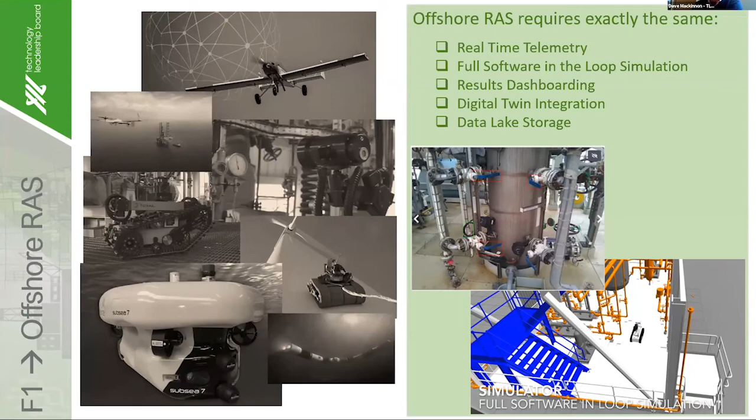That's a little bit where OLTER kicks in. It's the boring part of the TRL scale, the integration part. And funnily enough, when it comes to the Formula One analog, we have all the same elements in offshore energy. We already have real-time telemetry, full software-in-loop simulation, dashboards, digital twin integration, and data lake storage. It's all operating. Maybe the difference is that we're not quite at that final phase of industry pull.

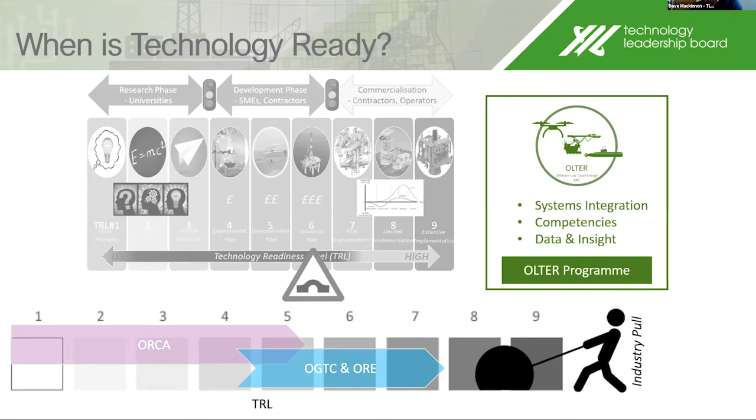We've learned, we understand how we are to integrate it. We've got the technology through ORCA, we've got the demos to a certain degree through OGTC and ORE. But what we don't necessarily have is that industry pull at the far end, where OLTER proposes to offer that through systems integration, through competencies, and through data and insight. And that specifically is writing the rules and the design standards to enable that to happen.

So OLTER is really proposing to be that front door entry for offshore energy organisations. At the moment, there is no one entity accountable for offshore industrial RAS. We've been working in that area for quite some time, and we've engaged across the board with OGTC, ORE, with ORCA, with the National Robotarium, and a number of other stakeholders.

But what they're all designed to do is to look after something else. There's nothing really there designed to be that one-stop front door for industry, where it can get its knowledge management from in terms of the technical standards, the testing and certification of vehicles, and generating that ecosystem.

Now, everyone tends to talk about data, and there is data out there, but at the moment it's very siloed. Even in the work that we've been doing in the past, we have performance data coming from the vehicles, we have payload data coming from the vehicles, and we have the digital twins. But what we haven't done is really connected it all through the industry.

By doing that, we are starting to enable a digital service, effectively that virtual wind tunnel, where you can start to drive vehicles in real life simulations, collecting data, and generating lessons learned through machine learning. And the important thing is that this is not, from an industry perspective, living labs or demo activity. This is actual site data that we want to collect.

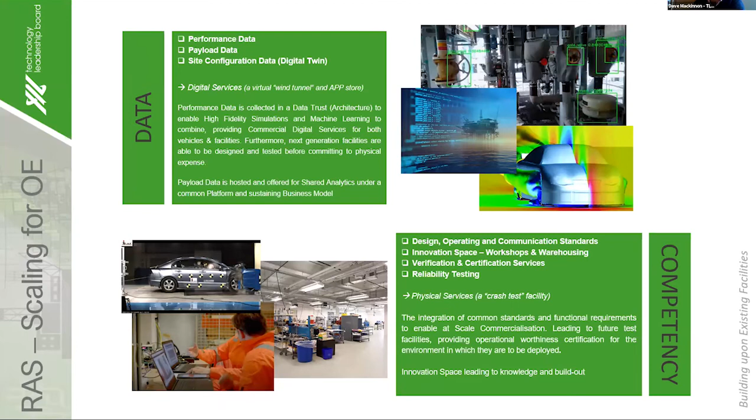That's one of the things we found with the video I showed a few years ago. We're now at the point of putting these devices on our facilities, whether oil and gas or floating wind. But when it comes to needing repairs, where can we get it repaired? Where can we get the warehousing and 3D printing to enable that repair mechanism? At the moment these devices are pretty much European or American, so we're having to ship them out of the country to deliver that service capability. We really need to have that in this country.

So what we've proposed is the OLTER program. It's not about new facilities, it's about bringing existing facilities together with a joined-up front door where industry can enter, and it becomes the feeder entities' responsibility to deliver that solution. At the same time, there's one entity as a service centre looking after the services and at-scale adoption, through collating data and providing it in a data trust scenario where we can work constructively to maximise insights, or on payload data that's not confidential, enabling new machine vision third-party services to be kick-started. On the competency side, we have a voice bringing together standards, specifications, testing requirements, and nurturing startup entities.

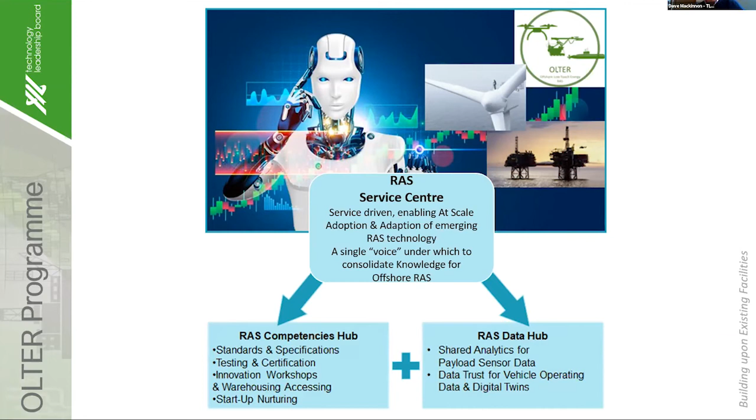What we see is this occurring over 3 phases. Phase 1 is a working concept, also around the economics and understanding of how best to achieve this, getting the architecture in place so we can start collecting data, showing insights, and collating the knowledge that's out there—be it through the IEEE, Sprint Robotics, BP, Shell, Total, SSE Renewables and others, Subsea UK, etc. That's about a 12-month program.